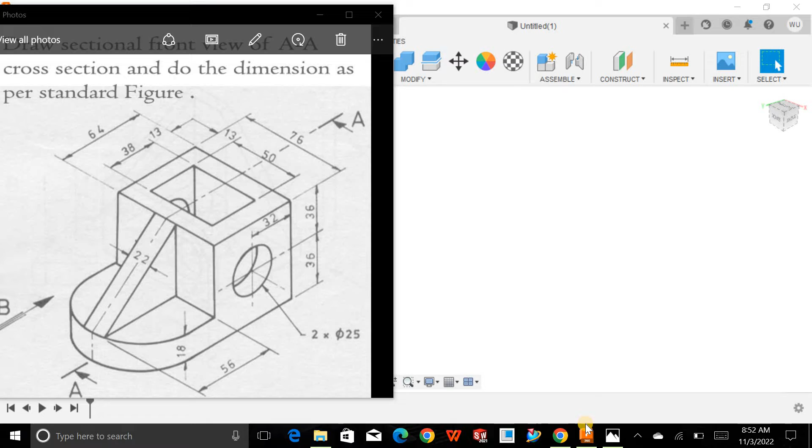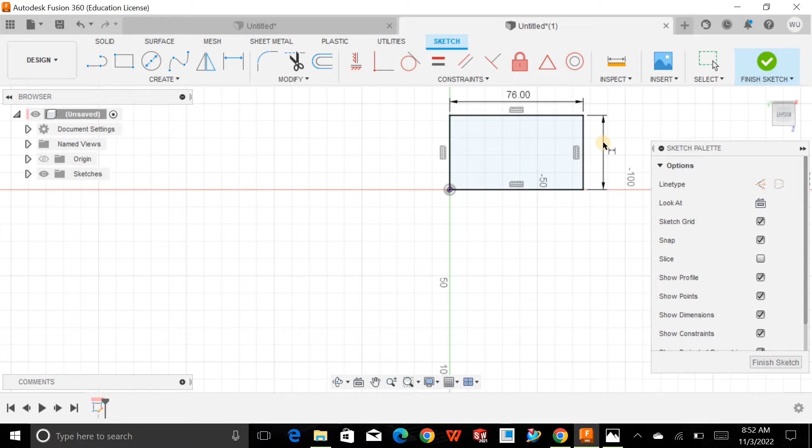Click on design and sketch, choose the proper plane, draw a rectangle, and dimension it: 76 and 64. Then finish the sketch.

Click on home, extrude it, and the extrusion is 72.

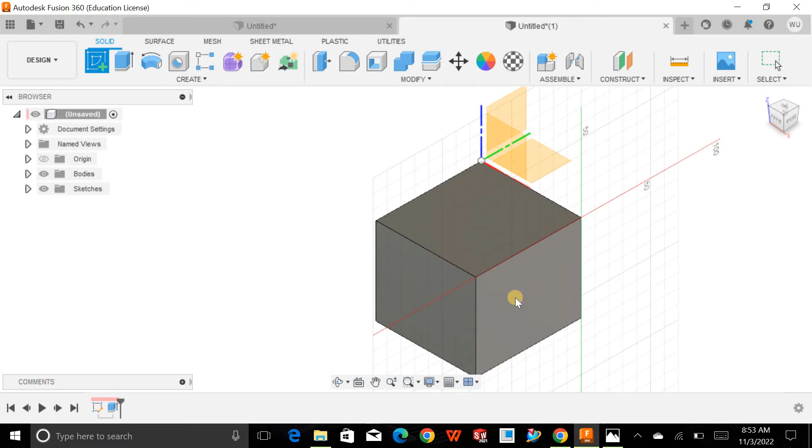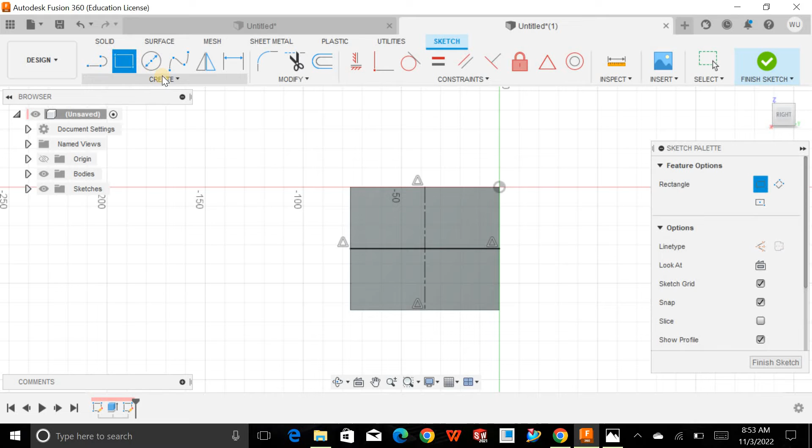Now again I will sketch this plane, and this time add center rectangles like this and like this. Click on the rectangle, center rectangle, add a rectangle and dimension it 50 by 38. This side is 50 and this is 38.

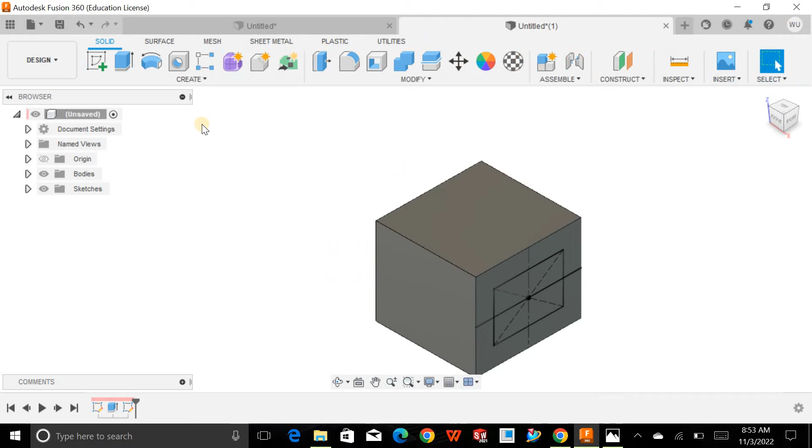Finish the sketch. Again extrude this section, create a cutout, with cut selected. This is fine.

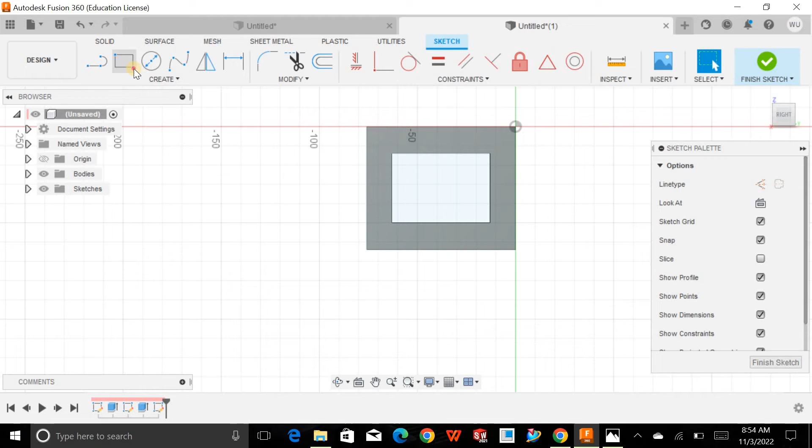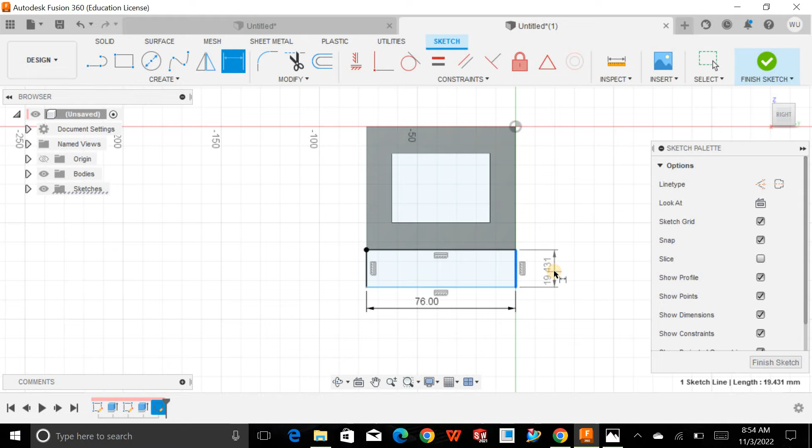Again sketch, choose this plane, draw a rectangle, and dimension it. This is 76, and this distance is 56. I will finish it and extrude it.

Like this, and this is -18.

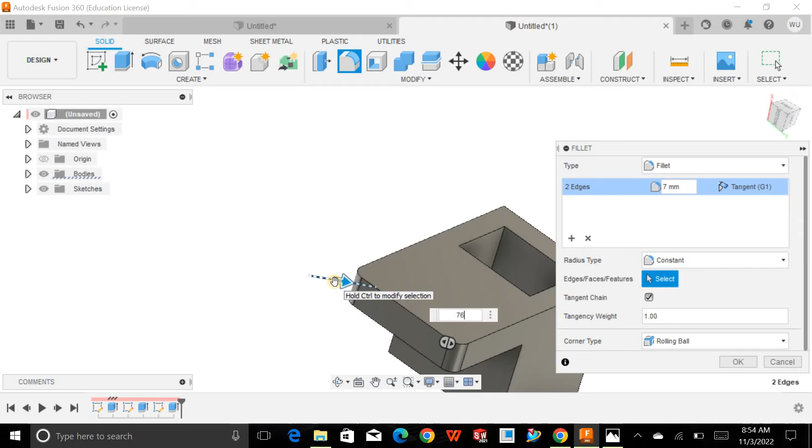Okay, now I will click on fillet, choose this and this, and set it to 76 by 2, which is 38, right?

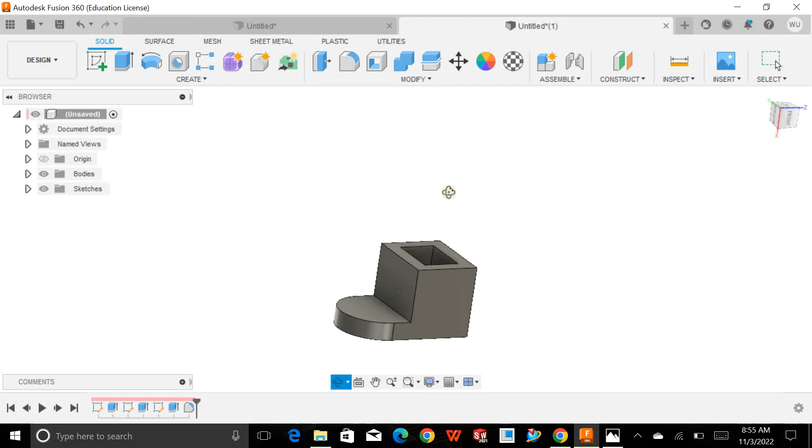This is fine. Now I want to create a cutout on this face. Sketch, choose this face, draw a circle like this and dimension it.

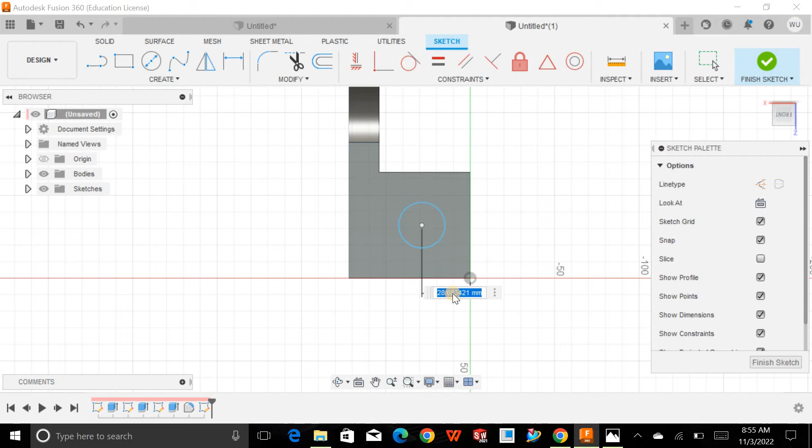From the top to here this is 36, and this diameter is 25, and from here till here this is 32.

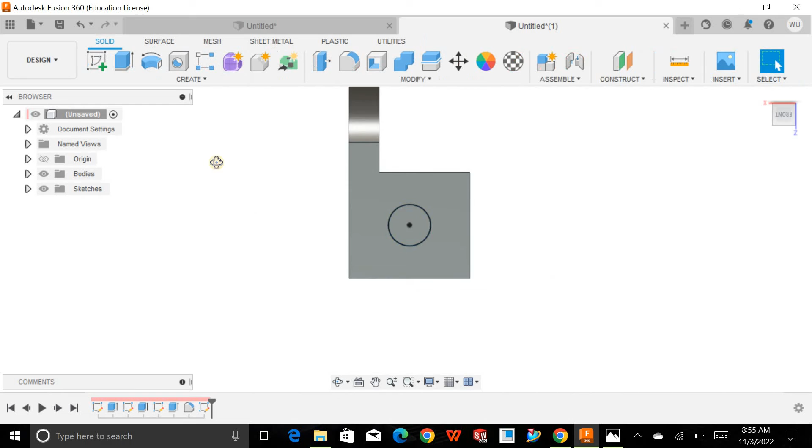I will sketch, extrude this face, and create a through-all cut. Okay, see, this is fine.

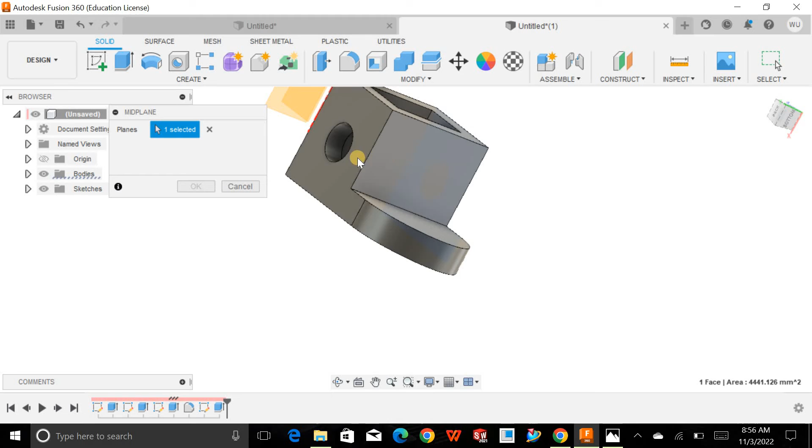And at the last I will create a rib. Construct mid plane, choose this face, press and hold control key in this face, and a plane is created at the middle.

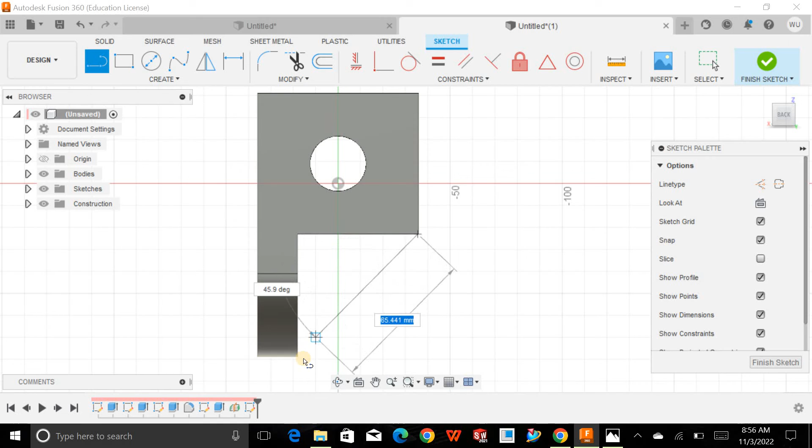Okay, sketch this middle plane and add a sketch line like this, and this, and this. Now dimension it.

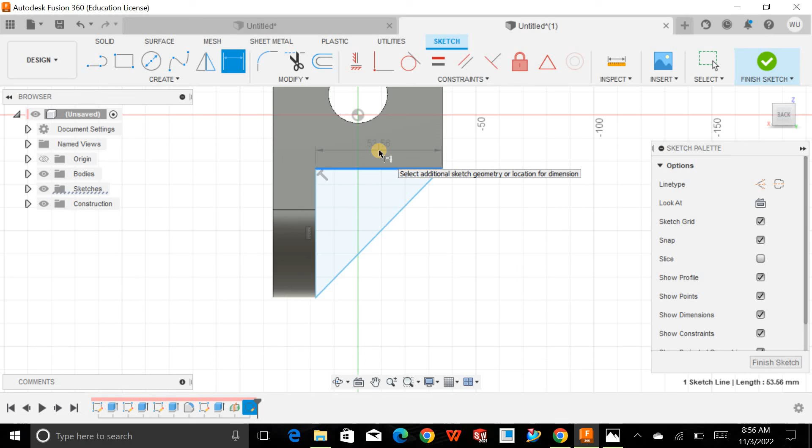This is 72 minus 18, right, and this is, you already know, this is 56. I will finish the sketch.

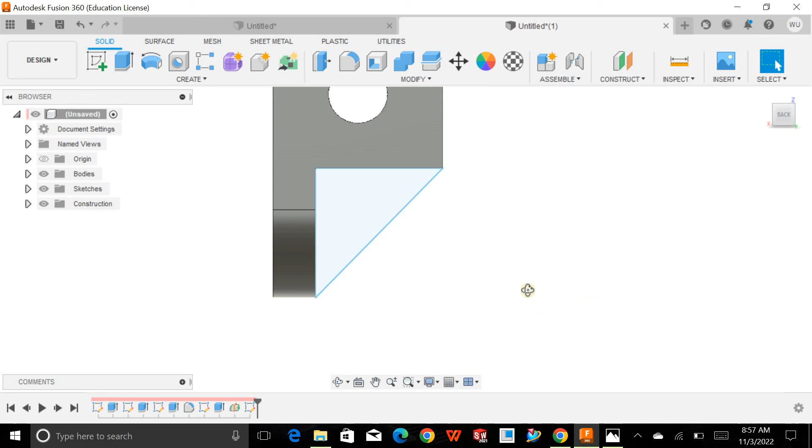Click on extrude and symmetry, and this must be 11.